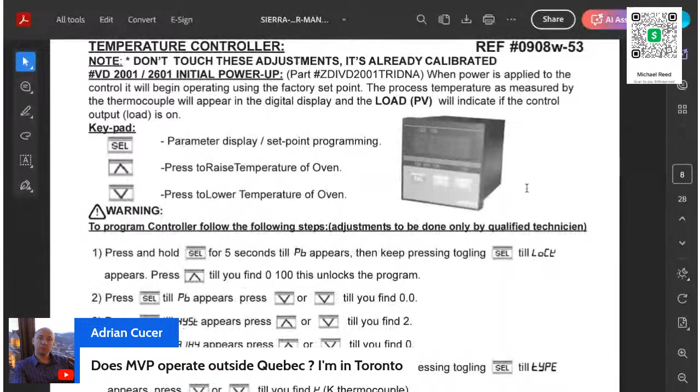So you get to learn on somebody else's dime, essentially. You don't have to worry about parts, so now you got tech support, you got the whole nine. There's every bit of information you need to know about delivering, installing, tech support. There's a controller which is extremely similar to quite a few of these ovens that are out there. Without taking too much time, like I said, they copied these other units to a T.

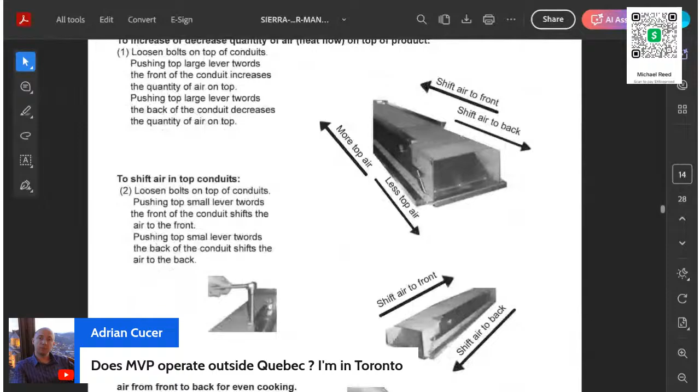Here's how you do the belt, which is still a pain in the ass. It's still a pain in the ass to do the damn belt. Some people knock them out, but I'm in that other camp where it is not always easy going for me. Like I said, all your information is here, you have tech support and you have parts.

Oh, now hold on, Higgins Appliance. Now, do you have any experience? You said it's the first time working on one. Now what part are you waiting on? Are you waiting on a contactor, or are you waiting on a timer / on and off switch, or what? Because a common problem with a TOSA, which is Prep All, and these MVP type stuff, you get flour in the contactor and it's no longer making connection. And then people go, 'Oh, what's wrong with this stupid thing?' And it's like, well, yeah, you've been slinging that damn powder around, and that's usually what I find.

Okay, alright, Kevin from Learn to Trade, he was on IG. Boxer for Rob, he was on IG. Sorry, I didn't get a chance to see what's up with you guys. Now let me see if I can find... let me make this a little bigger.

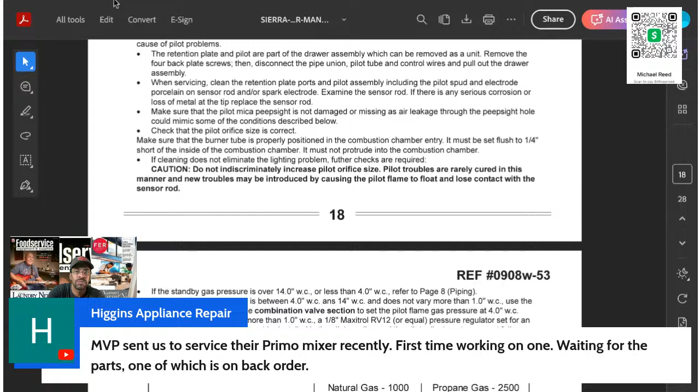Let me show you guys what Higgins Appliance is talking about. And more than likely, it's a mid-size, it's a small to mid-size mixer. I have to get out of this, bear with me.

All right, products, and then it's more than okay. I think he said Primo. So they have the Primo line, which is kind of catered towards pizza production.

But the link doesn't work in your region. What are other options? What do you mean the link?

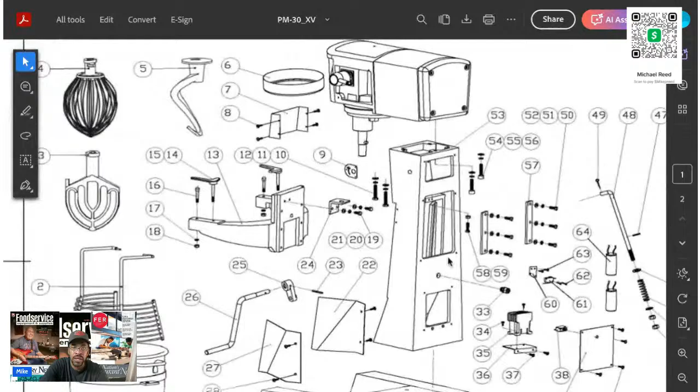Right here in the back is where the contactor is. As you see, there are two screws that this contactor is sitting on the platform for. You can undo those screws once it's unplugged, and the whole contactor and platform will come out. Chances are you're going to see that thing coated in flour. Once it's out, and you make sure the wires aren't touching anything, you can plug it back up, blow into it to get the flour out, and then see if the contactor will work.

Let me see how this thing works. Let me see. No. I think I gotta open up another thing to get Adrian some information.

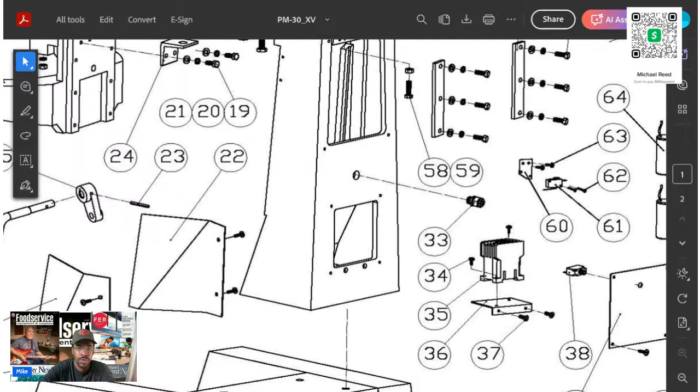Hold on one second, let me stop that screen. All right, one second, and then we'll be back. We'll be back at it.

Damn. I just had this thing. Oh, that's a different one. Damn it. Man, you could try this one. Hold on, I got a new one. Hold on, I just did a new one. Let me resend the damn thing. I don't know where the hell it is. Okay, there's the new one.

One second, and then we'll be back. Because I really do need to get this whole freaking thing figured out.

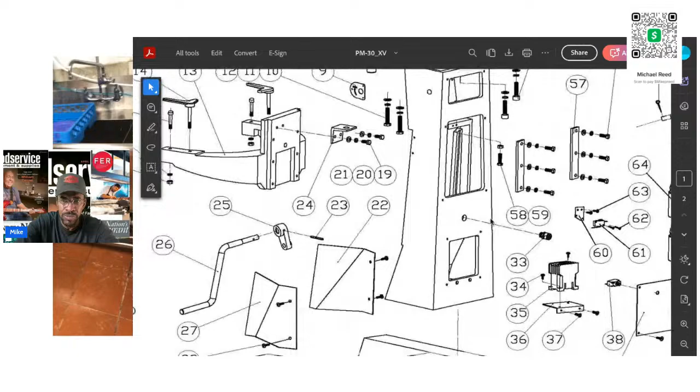All right, so like I said before, they have all the breakdowns, they should have the part. Now during this whole time, Higgins Appliance, what part? Oh, waiting on a gear and a gear wheel. What the hell?

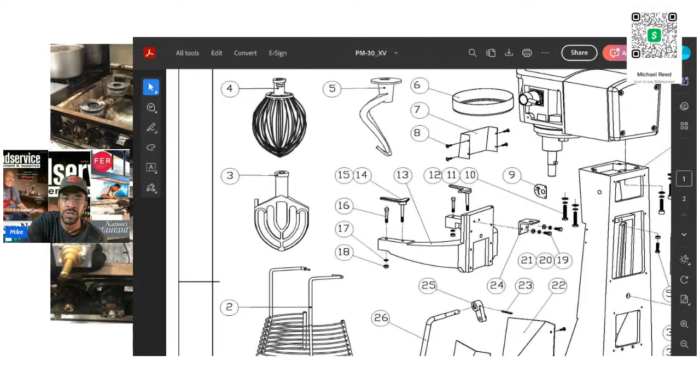Now just so you guys know, okay yes the mixer turns, the grinder doesn't. Oh, this isn't a mixer. You said it was a mixer, man. This is right there, they sent us a Primo mixer. All right, so you got me looking up the wrong thing, brother. Hey brother Charles, what's happening? All right, I hope everything turned out all right with that nursery school.

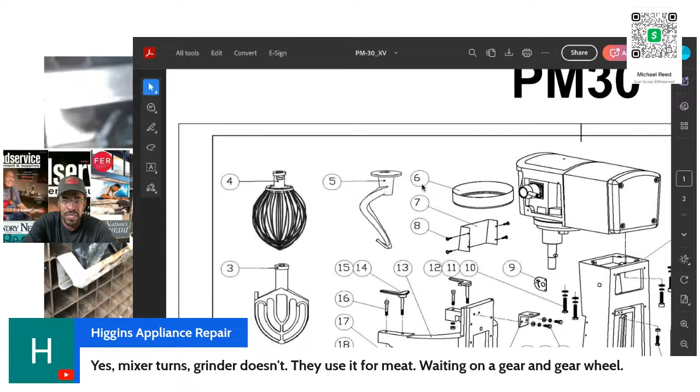All right, so it's a mixer, turns, grinder doesn't. They use it for meat, waiting on a gear and a gear wheel. What the? So this one has the attachment in the front, sort of like a KitchenAid, where you can use it. That is unusual.

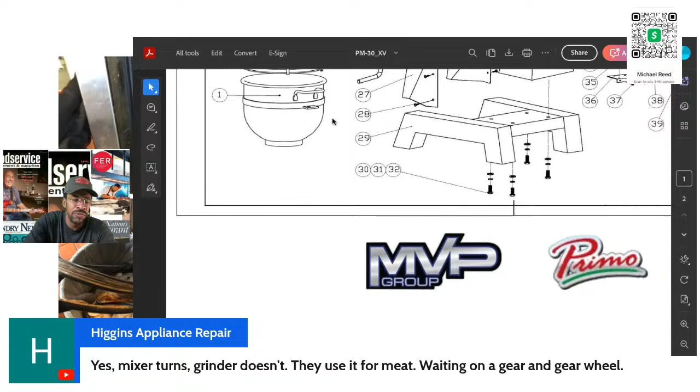I'm just gonna be real with you, a lot of times they opt to replace these units. When you need a part like that, they opt to replace them. All right, cool, okay so I was just about right.

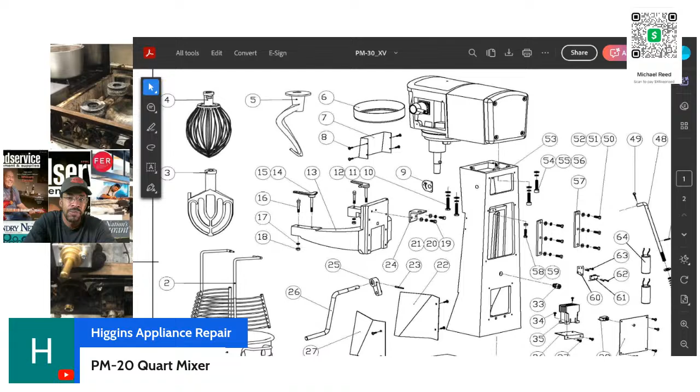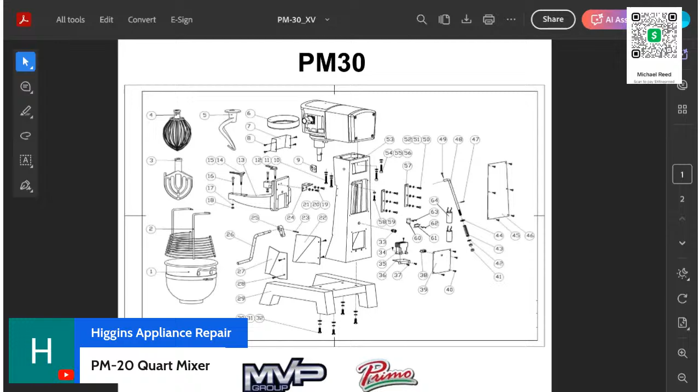I picked the 30 because these are their most popular ones. Let me put this like this. And let me go back. So yeah, if you know, they don't really have much help for you on these. They have the spiral mixer to compete with

the Italians. So the Italians like to say Italian design but Chinese manufacturing. So because they do their manufacturing in China, the Chinese factories will often copy what they're doing, and they use inferior parts.

So as you can see here, yeah they got the 30, and then when you get up to the larger ones, they're doing the spiral. So what he's talking about is this one with, so what the hell was that? Oh, that must be. It must be. I guess that thing works, huh? Must be a donation of some sort.

So if you could look at this picture here, that front, just like a KitchenAid, you take that cap off, and then they're able to put in the attachment. They take that cap off, and they're able to put the attachment for the grinder. So they could do meat, and then they can actually put in the little pasta attachment and do, cut the pasta and stuff like that. Do noodles and that kind of thing.

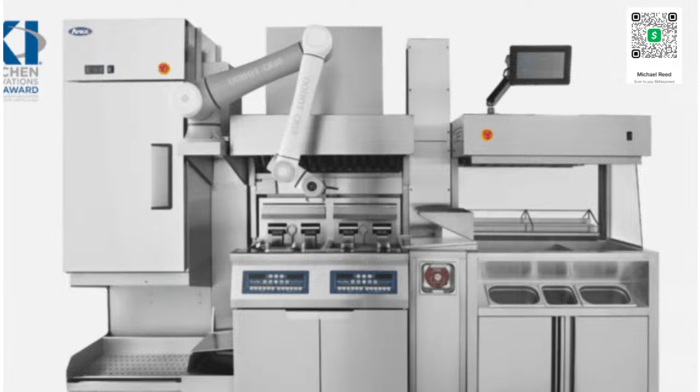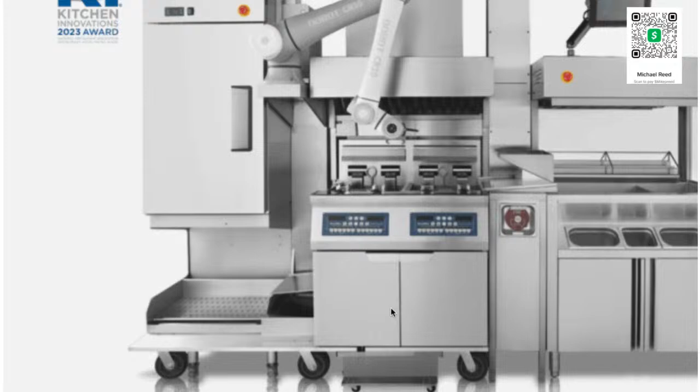If you do want to get in on the robotics trend, I did a couple of videos on this already. Atosa is rolling out the robotic arm, so they have a fully automatic, fully robotic back end where it's taking the french fries out of the freezer, putting them in the basket, and putting them in the fryer. All of this is Atosa, and then it will put the fries in the warmer. So if you get in with Atosa, there's an opportunity for that.

You also have the combi oven trend, they've been going smaller with the combi ovens. Like I said before, they have the PrepRite, they've got the MixRite, oh yeah, and the CookRite. And that is all, and there's the phone number. So Atosa, I haven't done any work for Atosa in a couple of years so I couldn't speak to it. I do have one or two people currently doing work with Atosa. They can chime in. Tech Gifts, what's up on IG?

So you do have that. So here's the number to Atosa. You can call them, tell them you want to sign up, let them know, hey, I'm in Canada, and more than likely they'll jump all over that.

So they do like to brag that they have warehouses all over. They just had a training session, I don't know when they're going to do another one. The training session was in Texas, it was in Dallas, they were flying people out there for it. I didn't attend, they invited me, but I didn't attend because there was no robot arm training. So I was like, I don't need to go to this, I already know how to work on a damn Atosa fryer. Of course when I first started with Atosa, they only had a few products, and now they've gone, they've got quite a bit now.

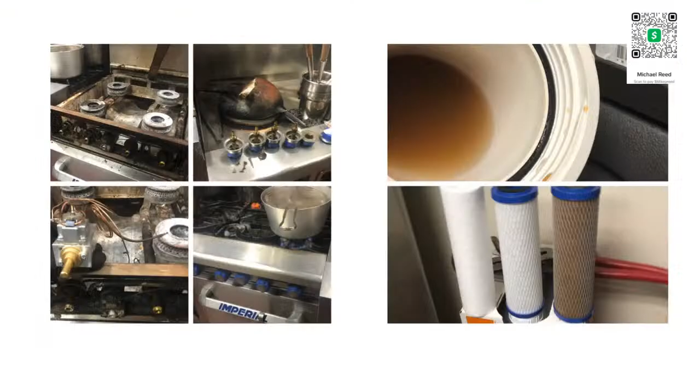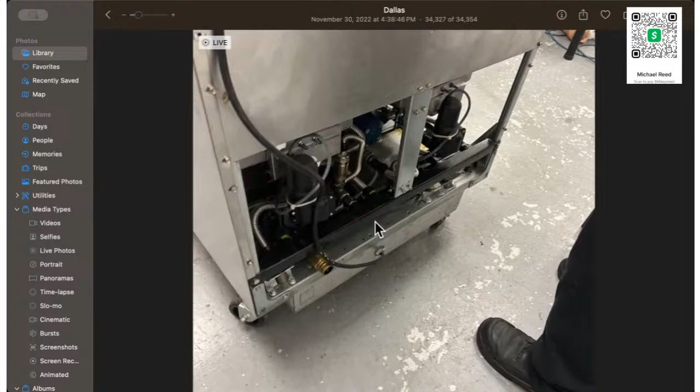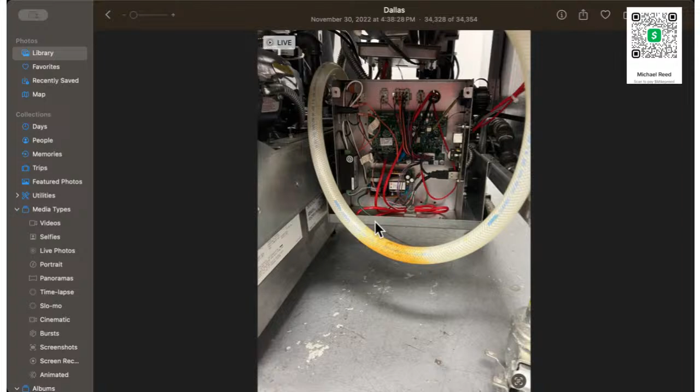Oh, this is a fryer. My bad, what the hell? I was in... oh, this is the... all right, I often go to training in Dallas. My bad, this is not the Stoelting class. That was Frymaster, man, that's why. Hold on a second, damn it.

Oh, let's see here, it's Jeffrey Wright, or what the hell is his name? Yeah.

Ralph Wright is my distributor, for the state of Texas. And as you see, it normally comes up, and so they train us on Dairy Queen. So that's what the DQ is, it's Dairy Queen. And then we have the batch freezers and custard ice cream machine.

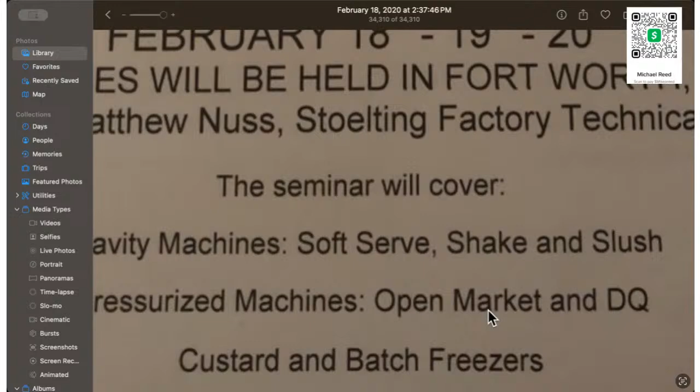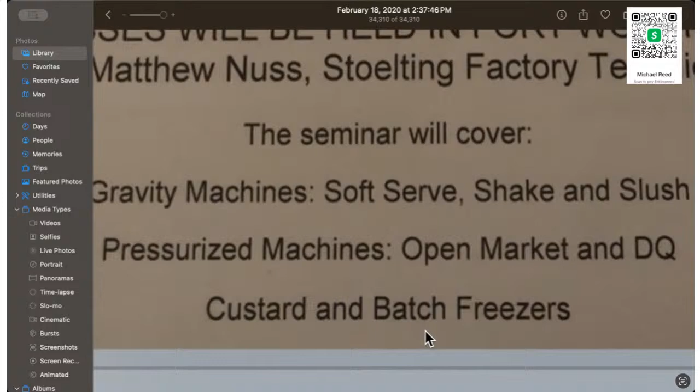So these are 3 different days. The 18th was soft serve, shake, and slushies. The 19th was Dairy Queen pressurized machines. And then the 3rd day is your custard and batch freezers, for Freddy's frozen custard and that kind of thing.

So this is my distributor. They only handle the state of Texas. They got on board with Stoelting early on. These guys are in their 70s, and they got on with Stoelting when they were in their 20s.

All right, so this was February 18th. So let me show you some of the pictures. February 18th, sorry about that.

All right, so I got a flat tire. I had got a flat tire going out there, man.

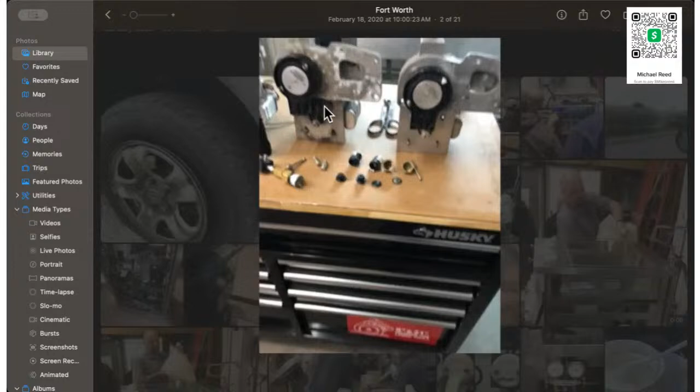So this is the pump, the pressurized pumps for the Dairy Queen machines. And this part was hands-on, we had the opportunity to take the units apart and put them back together. You can actually just replace the whole pump, the whole assembly. I think at the time it was $700, I think it's now over $1,000 for this pump, but you could rebuild it for like $200.

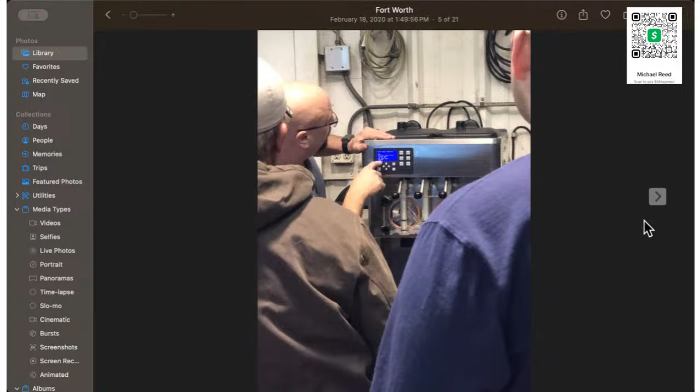Then they go over how to program the thing, go over all the different components, why it is the way it is, all that fun stuff. We go over the different parameters, what to do, when, and how to get to the area you're looking for, just powering up modes of operation.

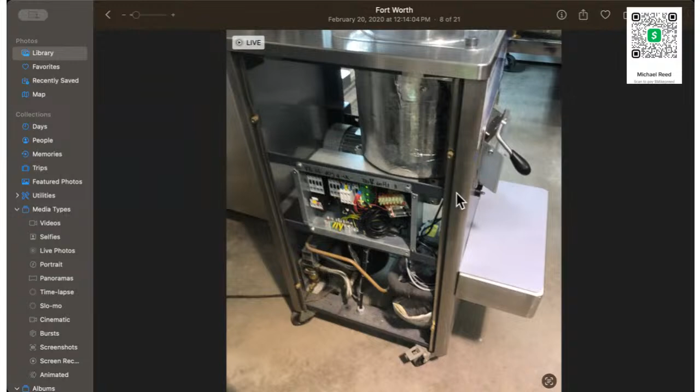Everything is open. So this is one of the batch freezers, how the batch freezer looks, the different components and everything like that. I want to say this was... I think this isn't, I was going to say what name brand.

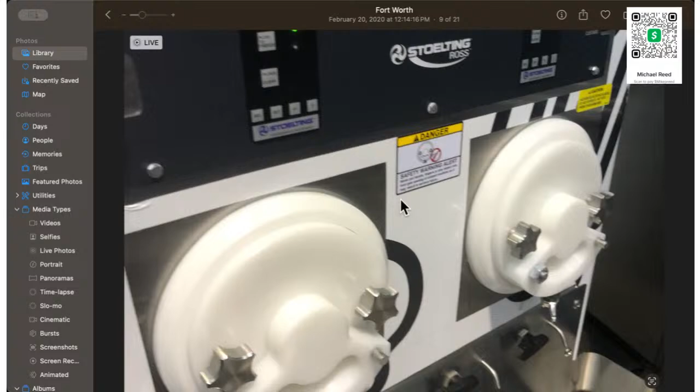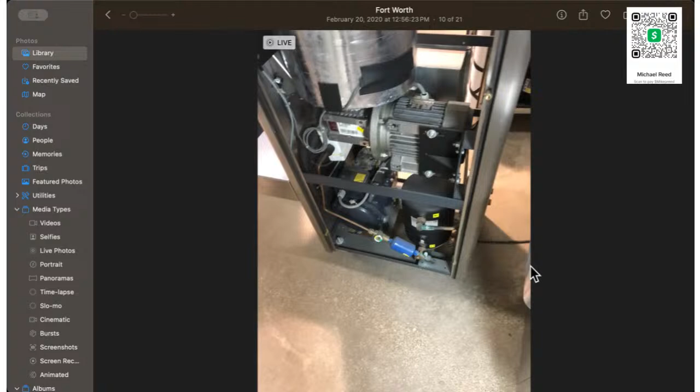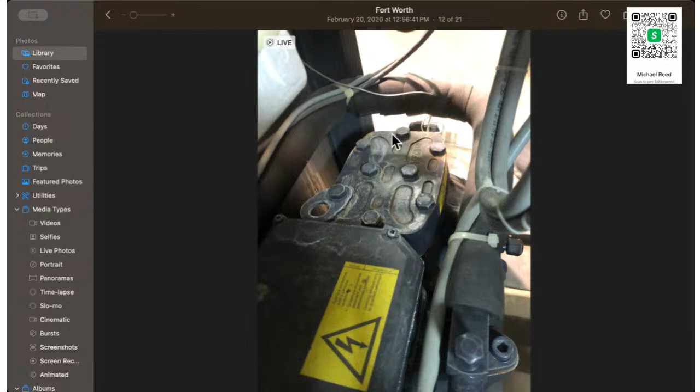So this is the compressor that you can rebuild. I've given you guys information on how you go to Johnstone and URI, and you can take the class that teaches you how to rebuild these compressors. So you don't replace them, you can rebuild them. There's the plate and everything like that, and you could rebuild that sucker.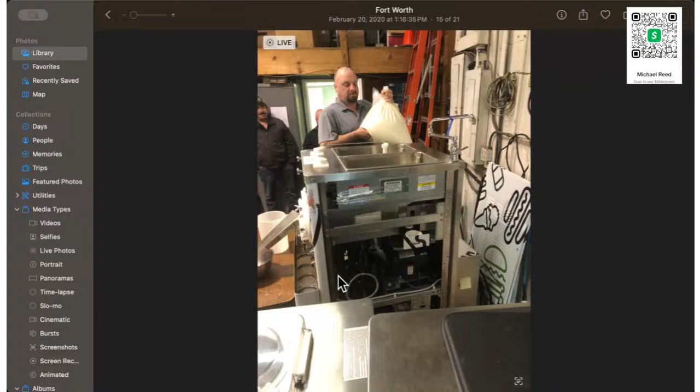All right, just a different part. So this is the mix. He gave us some of the Dairy Queen mix, and some of the custard mix, so we could have our frozen custard.

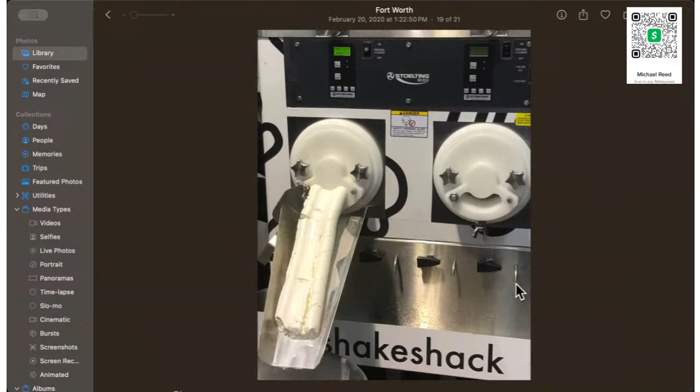We get to eat. So once again, this was the Shake Shack. They had an issue with that machine, and they took it in there to check it out and test it. And they are always looking for technicians to go out for them, because especially here in Texas, they are just in the weeds.

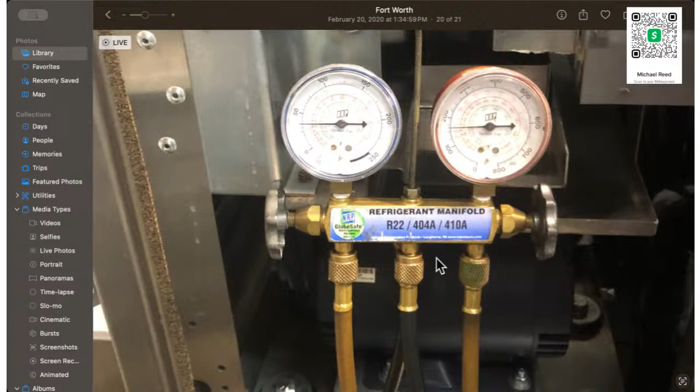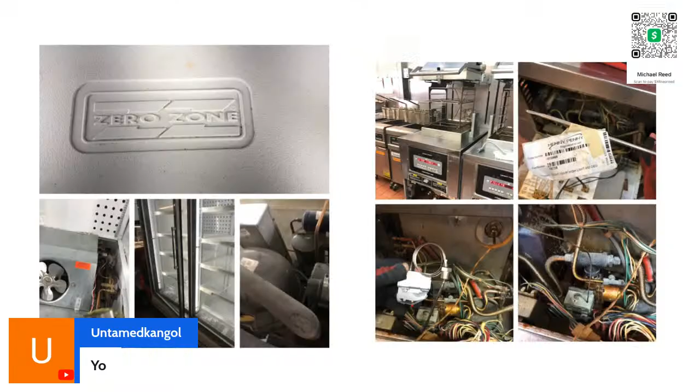Yo, Untamedkangol, what's happening? What is the word?

So you're gonna have to call Stoelting, there's the number, you're gonna have to ask. They'll give you the information, no problem. It's not an issue for them to hand you the information of the sales rep for your market, and it's no problem for them to give you the distributor. Now, once you get that information, it's going to be up to you to find out the training dates. If you do find out a training date, pass on the information, let a brother know so I can put the information out. I want to be the hub, let me be the hub to get you guys this information.

All right, let me see here. So that is Stoelting and Vollrath. Oh, let me see here, I need Woodstone.

Now, Woodstone, you got a couple of things going on with Woodstone. Woodstone is the one for Chipotle, so Woodstone is supplying some of the cooking appliances, some of the griddles for Chipotle. If Woodstone's not able to supply it, they're actually getting them from like Imperial and stuff like that. But the pizza oven, oh, and they got residential too, the pizza oven is the one in Mod Pizza.

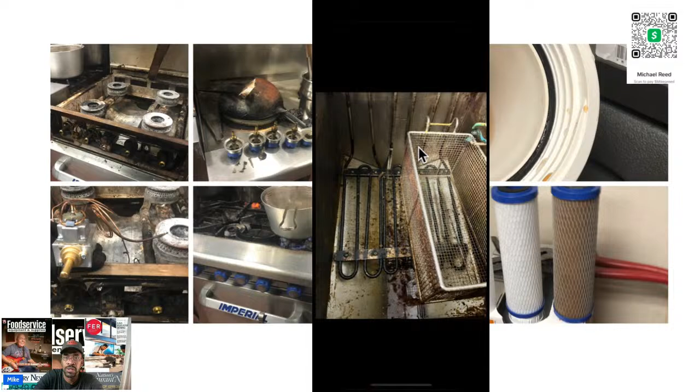You're all set. When your iPhone is nearby, you can seamlessly use your phone right from your desktop. All right, get started. Hold on, people, damn. Oh, hold on, let me use my biometrics. iPhone is in use, hold on a second. iPhone mirroring will connect when the iPhone is no longer in use. This is freaky, man, let's see if this thing works. Oh, ooh, iPhone mirroring, all right cool. Let's see what's happening. Ask every time. Yeah sure, why not? Score. All right, cool. Hold on people, hold on one second, trying to get this thing bigger. Bear with me, this is my first time using this mirror function. Okay, how the hell do I get this damn thing to work? Damn, anybody know how to get this damn mirror function to work on this? Anybody?

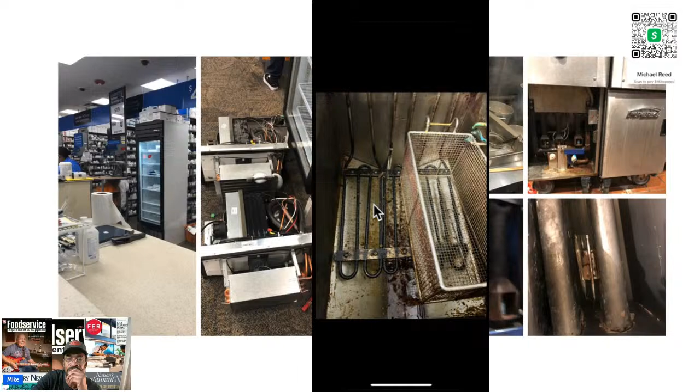All right, so this is a Vollrath job that I had today. Trying to move this thing without... man, this thing don't want to work. I'm trying to, maybe it's up and down. No, damn. Trying to get this thing to move from image to image. Oh, all right, maybe I'll just do this. Nope, that ain't working either. Oh okay, it does work a little bit. It does work.

All right, so Vollrath gave me this job, and I found a bunch of broken equipment at this location. Now this is not a desirable location, but I'm showing you this. And this is crazy because across the street, they called me for a tailor and I cussed them out. This is what they're doing. All electric, back in the day everything was electric. So on the existing Vollrath, I found that they've got grease in their plugs and they burned the wires going to the thermostat. So they're going to send me out a new one. I got pictures here, they got a graveyard over there. This was the one they just replaced. This is what they were using previously. So they're savages over there.

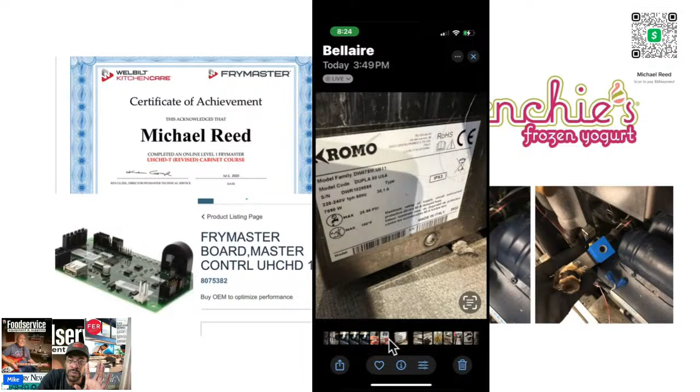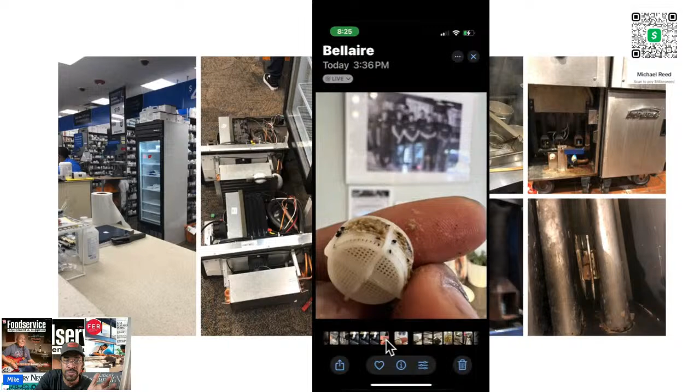Now this is a dishwasher. I did this before, as you see, this is today. Today at 3:30 I was over there, I actually installed this unit. So I installed this unit. They're having problems with their water quality. They were under the belief that they can just hose off their water filter and then reuse it. So yeah, this is what they end up having. And then they had some other issues. I ended up taking care of that.

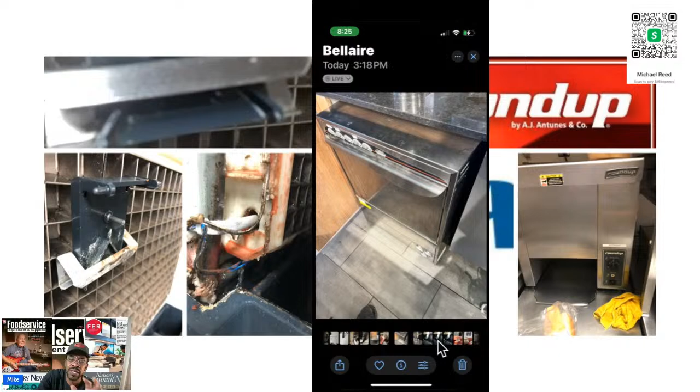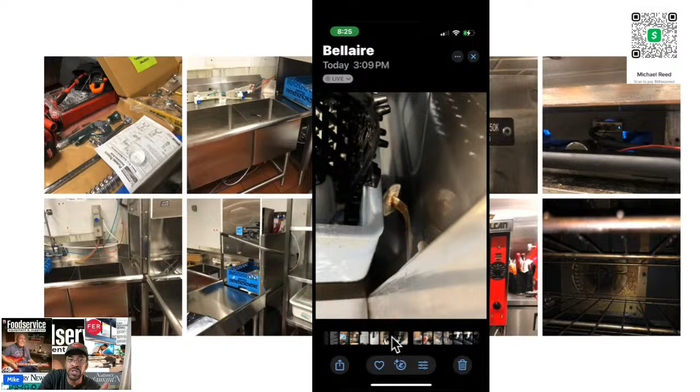This is for the milk pot rinser, so I actually took care of that. They had water leaking down. So this is the CMA dish machine, like I said, I installed that sucker. So I ended up taking care of that too. And then I found that it's missing quite a few pieces. That door should not open up all that way. But I'm showing you, yeah, different pieces are broken. There's supposed to be a stopper back there. And I'm showing you, I get these jobs. Now that's COD, that's a COD job. What the hell is that shit?

All right, let me stop that screen. That didn't work out as well as I wanted to. But whatever, it is what it is.